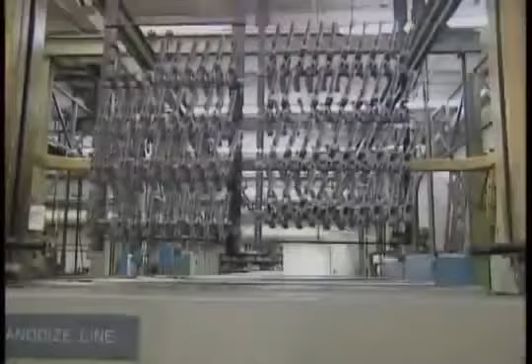It is forged from simple raw materials, but is so durable it can last more than 100 years. It has few moving parts, but its design requires complex engineering. Its purpose is basic, but it is one of the most powerful and destructive devices ever created: the making of a gun.

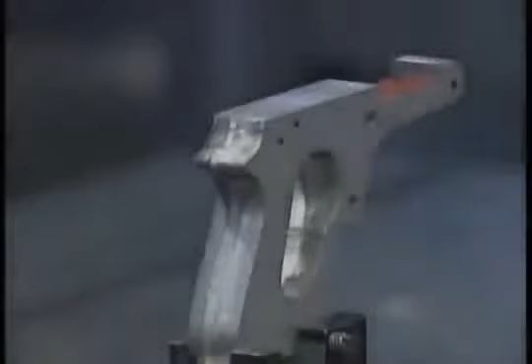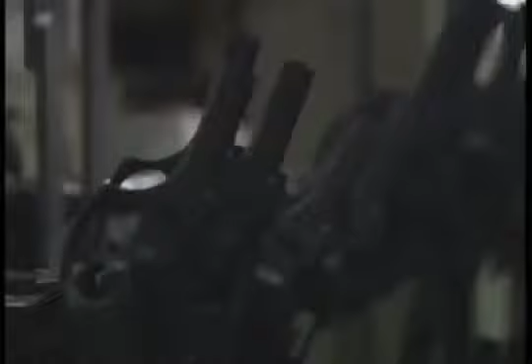In an unassuming factory outside of Washington, D.C., one of the world's most popular handguns is made. Tens of thousands of Beretta 9mm are purchased every year by the United States military and police departments. And though computers now do many of the tasks required to make a gun, the process mirrors procedures forged in the hearts of gunsmiths centuries ago.

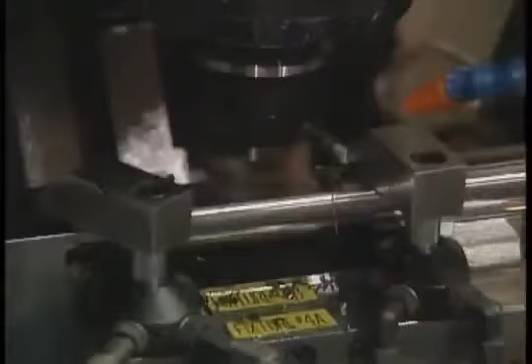Ever since the invention of guns, people have been fascinated by this handheld object that is a combination of art and craftsmanship, history, mechanics, romance.

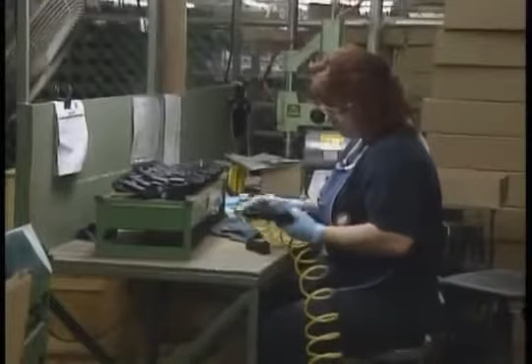Without the gun, where would America be today? We might be making Indian baskets. Maybe the British would still be ruling us. The gun has more fascination, at least in my experience, than any object ever made by the hands of man.

For those whose lives depend on guns, knowing that strict tolerances are adhered to on the production line brings peace of mind. If it gets down to gunplay, if it gets down to deadly force, then that's the way it has to be. And that's when I need the gun, and that's when I need to know, without any question, that that gun is going to work.

The making of guns and making them work helped revolutionize American society. The firearms industry was one of the first to use computer-aided design. Early gun makers were the first to use interchangeable parts, a radical improvement over previous technology. And guns were the first mass-produced item in the world. Knowledge developed from making guns forever changed how all businesses manufactured goods.

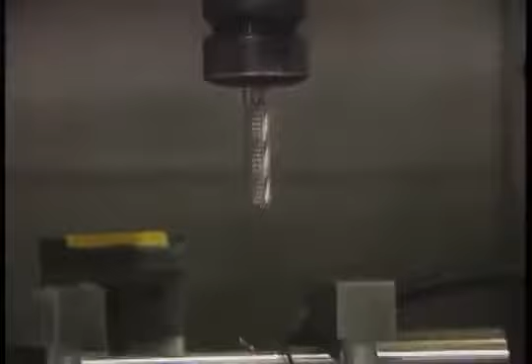We often think about Henry Ford as being the father of mass production. But in point of fact, the first 2 years of production at Henry Ford's Highland Park plant didn't equal the output of the Springfield Armory in the midst of the Civil War.

But it was some 400 years before the American Civil War that the making of a gun was first attempted. The first gun looks like a vase, and there's an arrow in it. And there would be a small touch hole in that and the powder inside, and when you ignite the powder, the arrow flies out.

But the crude early attempts were riddled with flaws. A gun rarely worked, and often wounded or killed the person trying to use it.

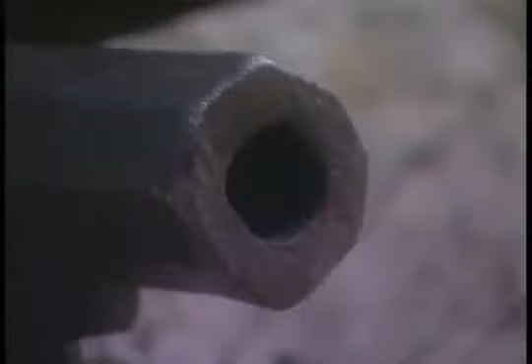The design was quickly replaced by the ancestor of today's firearm, the hand cannon, the little brother of the field artillery used at the time.

Not much is known about who developed the hand cannon and how, but the end result was much more effective than earlier attempts to make a gun. Heated wires were placed into the back of the tube to ignite the charge. Though rudimentary, the hand cannon was able to fire. The first version of the modern gun was born.

Nearly 2 centuries later, in the fledgling colonies of America, blacksmiths were busy retooling their workshops to deal with the increasing need for guns.

The firearms industry was busy experimenting with new types of materials and production styles, but making gun parts, such as the barrel, was still a time-consuming process.

These gun barrels were initially all hand-forged over anvils, and what you had was a ruler of iron about 3 feet long and about maybe 3 inches wide, and you had to heat that ruler of iron to a red heat until literally the middle turned red. And then you had to shape that with a hammer over an anvil to round it over a bic iron, which is a tube that you kind of inserted so the thing didn't close up on itself. But you literally shaped this through numerous heats until you had a completed tube, basically in the shape of a barrel.

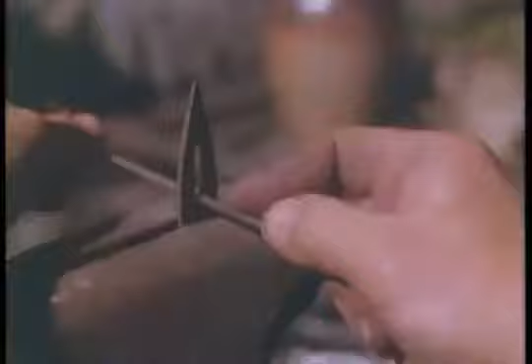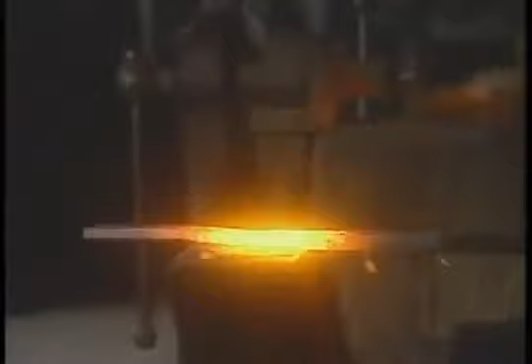One of the things that's interesting about this business is that we often think that one gunsmith made the entire gun. But in point of fact, the more aggressive and more successful gunsmiths often bought parts. For example, by the 1790s, early 1800s, there were individual shops around that just specialized in making gun barrels, as there were shops in England which manufactured firing mechanisms or gun locks and sent them to the United States.

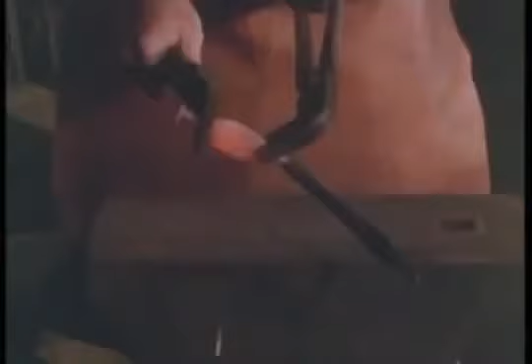It's very rare to look at a firearm made in the United States around 1800 by a small shop artisan and not find pieces made by other groups. I think it's correct to think of early American firearms as art objects. They're beautiful in many ways. They reveal a degree of workmanship unparalleled in most other areas of craft, because a gunsmith had to be a worker in iron, had to be a woodworker, also had to be a brazier working with brass, and oftentimes had to be an engraver.

But there were flaws inherent in early guns. Because of inconsistent forging techniques, barrels would sometimes fail when fired, often in the face of the person pulling the trigger.

Unfortunately, in those days, it was hard to tell whether you had a good barrel or a bad barrel until you proof tested it. You'd take it out on the grounds, put about four charges of gunpowder in it, and light it off to see if it would stand those charges.

There were other problems as well. It took gunsmiths up to a month to make a single gun. The price was prohibitive. Construction costs of a standard military musket in the late 1700s were between $13 and $15, a considerable sum of money for the time and place.

If you were to look at the wages of an ordinary working person at that time, say a farmer, I doubt very much that many farmers were making $15 a month in their wages. So if you compare the price of a musket with what people were earning at the time, you find out very quickly they're very expensive.

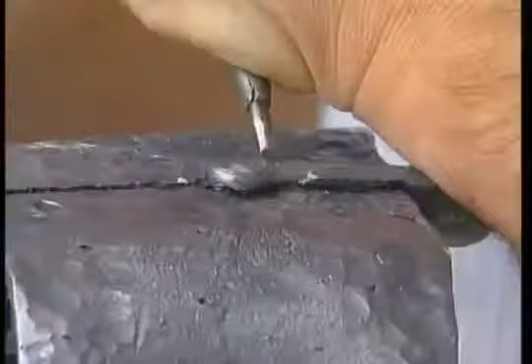One reason weapons cost so much was that each gun was unique. There were no interchangeable parts. This was a major drawback. If a part on a gun broke, such as the firing mechanism, a new firing system would have to be constructed specially for that gun.

It was a time-consuming and frustrating experience, especially for soldiers fighting on the battlefields of the American Revolution. Imagine a battle, and a part on a gun breaks for whatever reason. Perhaps it's the hammer that snaps. Perhaps it's one of the springs inside the lock plate. That rifle is absolutely out of commission.

Now, a gunsmith or an armorer would travel with a regiment. We're talking about a primitive operation, a little forge set up, a couple of hammers, some files, and this armorer is trying like mad to repair or make a new part to make that weapon serviceable again.

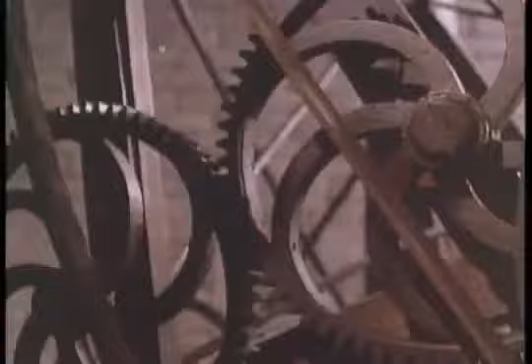One of the businesses Whitney went into was gun making. The federal government gave him an order for 10,000 muskets that had to be completed quickly. It was an order that even the self-assured Whitney knew would take years to fill. He would have to find a way to mass-produce the guns in order to make his deadline.

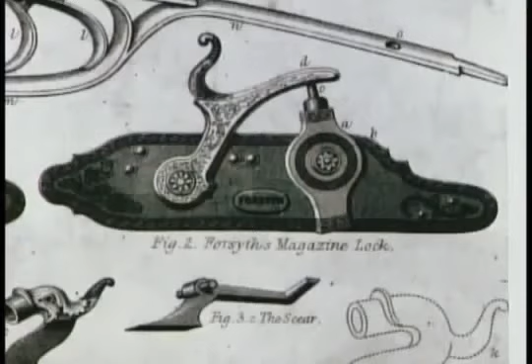And in order to mass-produce guns, he would have to make identical, interchangeable parts. That was something that had eluded gun makers for centuries. He had difficulty meeting this contract, and in order to cover up the fact that there were significant delays, he said he was trying to perfect a system of mass production and parts interchangeability. Whitney knew if a weapon could be developed in which parts were easily exchanged, the making of guns would never be the same.

When Whitney's delivery of muskets was delayed, he said it was because he was busy refining the nation's first gun made with interchangeable parts. To prove his claim, he invited government representatives to his factory to see for themselves.

He took several of his guns apart, mixed them all together, and then proceeded to put together several locks. The fact is, this was something he had prearranged. If he had been asked to do this with any one of his guns, he would not have been able to do it. Whitney, in his own lifetime, never did really achieve it, and the easiest way to tell is to get hold of some Whitney-made muskets from his first contract and disassemble them, and you'll find out very quickly that those parts are just not interchangeable.

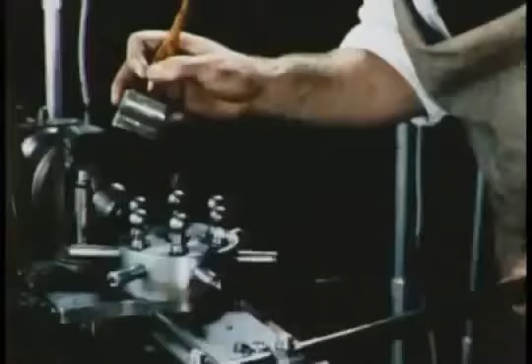Whitney eventually delivered his guns, but his quest for interchangeable parts had failed. It would be another 30 years before a trio of gunsmiths from a small town in Vermont would discover the secret to interchangeability and revolutionize the world.

During the early 1800s, vast improvements in manufacturing were being made in the United States. No industry saw more rapid change than the business of making guns.

Many weapons made during early American history were considered works of art, adorned with brass, ivory, and fine engravings. It was not uncommon in the late 18th, early 19th centuries to find guns heavily embellished with silver and brass inlays. Some guns, I've even seen one where the barrel was made by a guy named J. Christ, a barrel maker down around Lancaster, Pennsylvania, who evidently did nothing else except make barrels. This particular gun had not only brass and silver inlays, but also ivory inlays. It looked like it was almost made in Arabia or somewhere like that, almost un-American in its decoration, and yet it is a Lancaster County-made firearm.

But gun buyers still had to deal with the lack of interchangeable parts. If just one part on a gun broke, the weapon was rendered useless. Gun makers knew that if firearms could be made with exchangeable parts, guns could be mass-produced, a step that would forever change the industry. Though some designers had limited success, none could create machines with the intricate tolerances required to consistently make gun parts the same size.

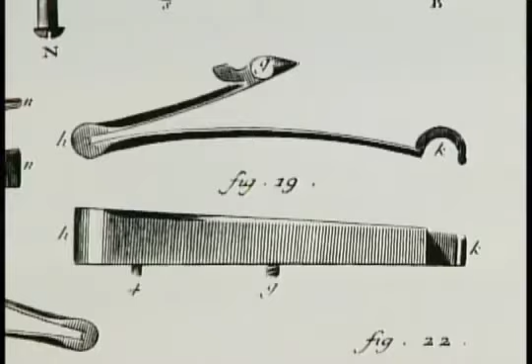But all that changed during the early 1840s in the small hamlet of Windsor, Vermont. There, a trio of businessmen, Nick Kendall, Samuel Robbins, and Richard Lawrence, had an idea. They wanted to use the river that ran through town to power machine tools. The three men incorporated the river's energy with their ideas of mass production. The result was some of the world's first automated gun-making machines, machines that made gun parts the same size over and over again.

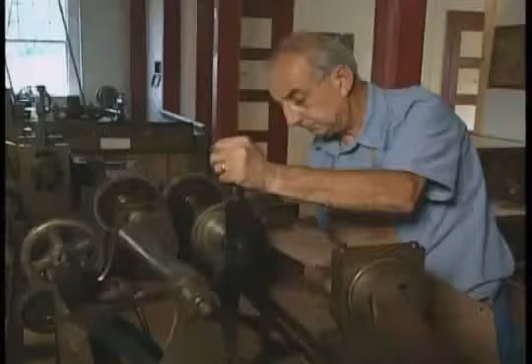Well, the secret was, let's begin to use some of these new machine tools that are starting to show up. Machines that could now begin at least to cut the contour of the stock of a rifle so that you didn't have to carve it by hand. Simple milling machines that could begin to form a lock plate for a rifle. A simple lathe that might be able now to turn a barrel instead of forging a barrel.

The company experimented with new designs as well. Nick Kendall developed a different position for a firing hammer thanks to the dress of his bride-to-be.

The story goes that Nicanor Kendall was out in his buggy with his fiancée. Of course, those days you carried your rifle with you in the buggy. You're out in the countryside looking around, beautiful day. Some critter crosses the road in front of him. Kendall reaches down, grabs his rifle, pulls it up to his shoulder to take a shot. In the process of lifting his rifle, the hammer gets caught in his fiancée's petticoat, just enough to pull it back, it snaps forward, the gun discharges. Kendall feels this terrible burn. He's sure that the bullet's gone right through his hand and killed his fiancée. By the time the smoke clears, he realizes no, he just got a small powder burn, and his fiancée, thank heavens, was fine. That led Kendall to come back to his shop, begin to putter around, and develop the underhammer, so there would be no danger of the hammer getting caught on somebody's petticoat.

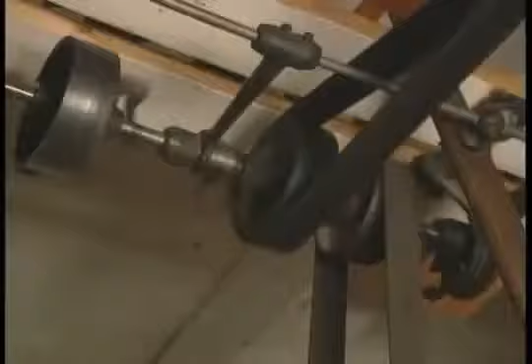By 1843, after years of trial and error, the firm had finally perfected machine tools that adhered to the tolerances needed to make interchangeable gun parts. They received a government contract to produce 10,000 rifles. The faster they made the guns, the more money they made. It was great incentive. The technology all comes together, and these 10,000 rifles they produce for the government, every nut, bolt, and screw, every component part is interchangeable one gun to the next, not with any sloppiness in the tolerances, but beautiful, fine fit and finish. The government's thrilled. They finally have got interchangeability, this quest they'd been after for so many years.

The moment marked the beginning of a manufacturing revolution. Other gun-making firms, including the government's own armories in Springfield, Massachusetts, and Harpers Ferry, West Virginia, quickly followed suit. It's the period between 1815 and 1864 that you begin to see the germination of this new technology, based on the introduction of machine tools and precision measuring devices, that culminates in tremendous production taking place, not just at the Springfield Armory, but across the entire American firearms industry.

Kendall, Robbins, and Lawrence continued to lead the field. In 1851, they traveled to London to display their guns at the Crystal Palace World Exhibition.

Their display consisted of nothing more than taking six of these Mississippi rifles, disassembling them, scrambling the parts around, and then reassembling them. The British went berserk—they couldn't do that. The only analogy would be the reaction we had when the Russians launched Sputnik.

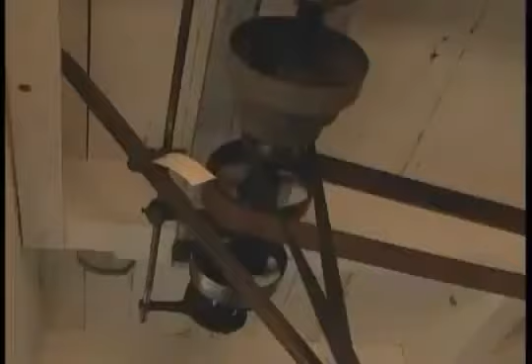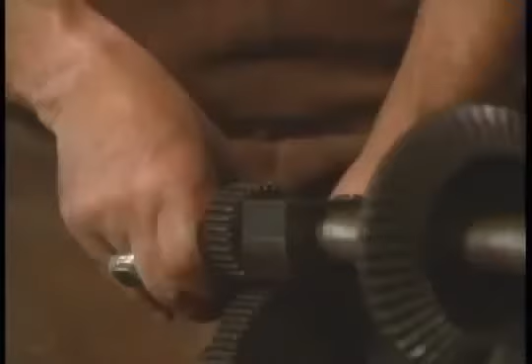Kendall, Robbins, and Lawrence agreed to make guns for the British. When the Crimean War broke out in 1853, they were given an order to produce 25,000 Enfield Minié rifles at a cost of $25 each. Once finished with that, there would be another order for 60,000 additional rifles. The contract contained a penalty clause if the firm didn't deliver on time.

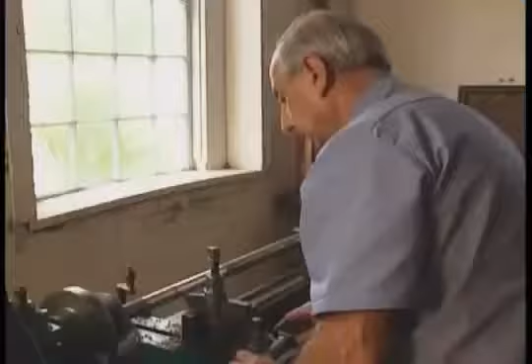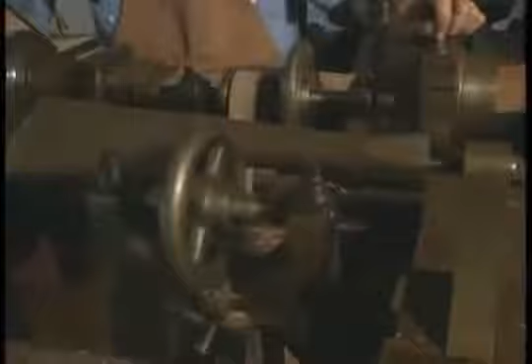It was like a black cloud. Everything imaginable that could go wrong with the production of these guns went wrong. Really silly things—like the wood for the stocks of these Enfield rifles came from Pennsylvania. There was a drought, all the little sawmills shut down, and they couldn't get any wood for the stocks for a whole summer. The gauges requested from England were made out of hardwood, and on the sea voyage over, they split open. Robbins and Lawrence had to make their own set of steel gauges. So it was one delay after another.

By the time the Crimean War ended in 1856, Kendall, Robbins, and Lawrence had delivered only 14,000 rifles of the initial order. The British government sued, the company went bankrupt, and in order to satisfy creditors, the firm's factory became property of the English Crown.

Ironically, one of the most innovative gun manufacturers had been put out of business on the eve of the most concentrated push toward mass production of guns the world had ever seen—the American Civil War.

No matter how they may have felt politically, on the eve of the American Civil War, gun manufacturers both North and South knew they were in for a financial bonanza. The only problem was how to keep up with demand. The makers of firearms began experimenting with new ways to make guns faster and cheaper.

A firearm made in 1864, compared with a firearm made in 1815, was qualitatively a much better gun—primarily because there were fewer possibilities of failure. Barrels were not going to blow up as often as they would have in 1815. Technologies had improved to the point that you just had fewer failures of parts than in that earlier period. The result was the most efficient system of manufacture yet in the history of any product, and it was the gun makers who led the way.

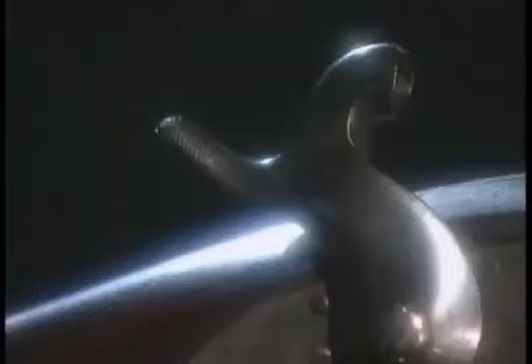Huge orders for guns became common during the war. Factories struggled to keep pace, and raw materials such as steel and wood became as valuable as food.

The gun manufacturers of the North, especially the armories at Springfield and Harper's Ferry, became the nation's first centers of mass production.

But the logistics of shipping raw materials to firearms manufacturing plants, especially during wartime, was a tremendous challenge.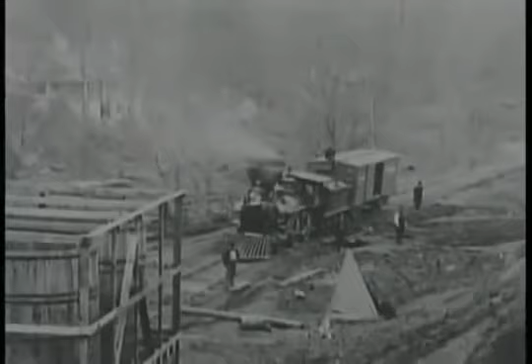Railroad lines became vital links. Materials were shipped by the trainload to gun-making plants. Within days, crates of rifles and pistols were on their way to the front. It was a 24-hour-a-day operation.

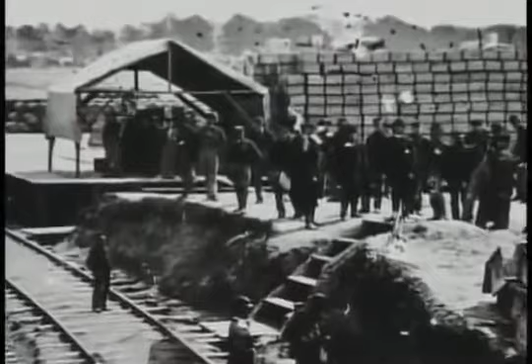The Civil War is a period of big change in gun making because it's a time that witnesses the manufacture of firearms in very, very large quantities.

The Springfield Armory, which is one of the two national armories in the United States at that time, by 1864 was manufacturing well over 250,000 rifle muskets a year.

Increased productivity brought opportunity. As one model of gun was tested on the battlefield, the next generation of design evolved from its predecessor's mistakes.

Firing farther and faster was the battle cry of gun manufacturers. Technology improved more during the 4 years of the American Civil War than in any other time period in the history of the gun. It changed the course of the way battle was done.

It changed the way that guns were made, and it increased the ability to kill dramatically.

Imagine that at the beginning of the Civil War, some regiments were going into battle still carrying smoothbore, flintlock muskets left over from the Revolutionary War period.

By the end of the Civil War, the repeater is developed. The modern cartridge, exactly the same as we use today, has been invented. Even the principle of the machine gun, the Gatling gun, had been laid out. So all of this happens just during the period of the Civil War.

A technological change in firearms that is probably as dramatic as the technological changes that we're seeing with computers today.

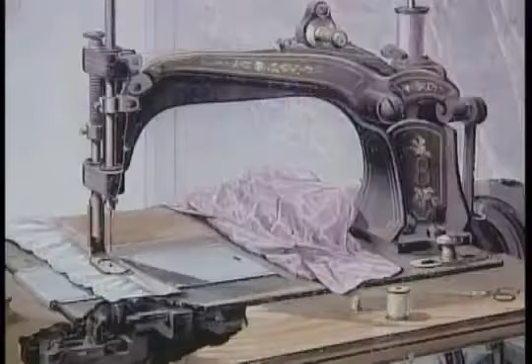The Kendall Robbins and Lawrence factory in Vermont, which had supplied guns to the Union during the war, was refitted to make sewing machines. The Remington Firearms Company, which made rifles and revolvers, retooled its gun-making machines and later made typewriters.

The bounty of weapons that had been produced during the war went home with the soldiers. Well, one of the interesting side effects, or after effects, of the Civil War was the enormous number of firearms that entered the general population after the war ended.

There's been a lot of new research on what happened to the guns that Union soldiers were carrying during the Civil War, and the answer is that they were allowed to carry their guns home. And of course, this meant that hundreds of thousands of new firearms entered the general population, whereas they hadn't been there before, or at least not in those numbers.

The United States in 1865 was probably the most heavily armed society in the world at that point because of that phenomenon. The lessons learned during the Civil War propelled gun manufacturing well into the 20th century.

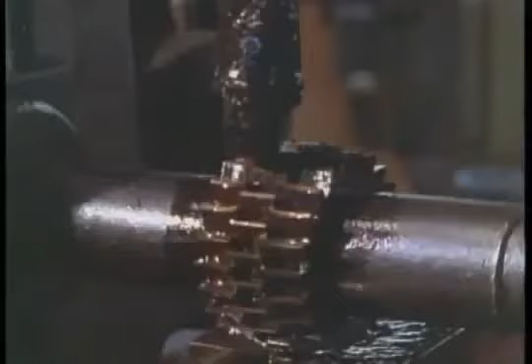American gun makers continued to push the limits of new technology. Stronger metals were used to make guns lighter and more durable. Improvements in gunpowder and bullets helped make firearms more lethal from longer distances.

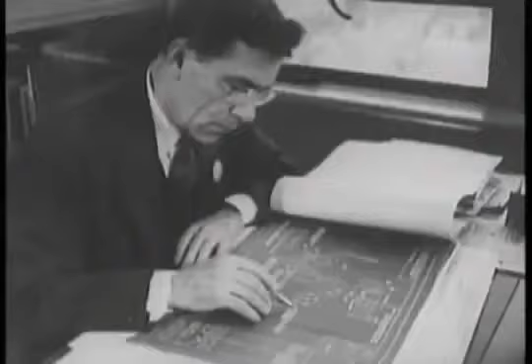The gun-making expertise of U.S. firearms makers caught the attention of foreign governments, and the United States became the world's top exporter of guns.

Americans selling to a lot of people, Americans tooling the armories of other people making better guns and driving Americans out of those markets. And then, it's almost as if the beginning of World War I began with the end of the Civil War.

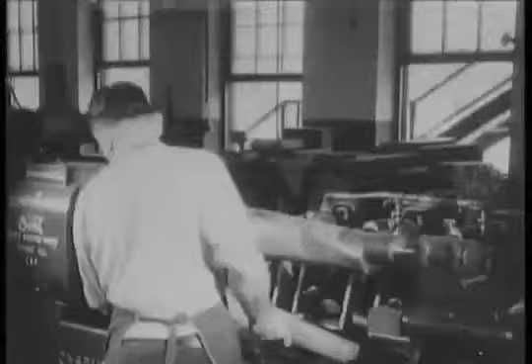During World War I and World War II, guns were the ultimate item of mass production. A machine tool factory could be refitted in less than a week and have firearms pouring off the assembly line.

Changes in gun design allowed firearms to fire faster with more killing power, and the pace of manufacturing had drastically accelerated.

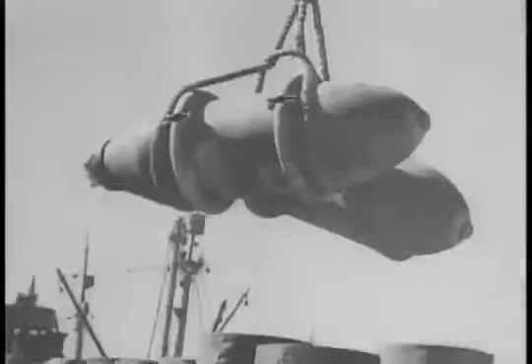But the process continued to be cyclical. Every time the world geared up for war, firearms manufacturers were able to meet the demand. Hundreds of thousands of people would be put on the assembly line, and millions of weapons would be pumped into the war machines.

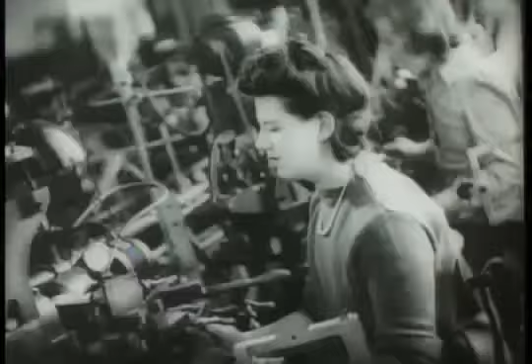As wars ended, gun production would drop dramatically. Factories would again return to making consumer goods like radios and televisions, employing the same production techniques used to make guns for the military.

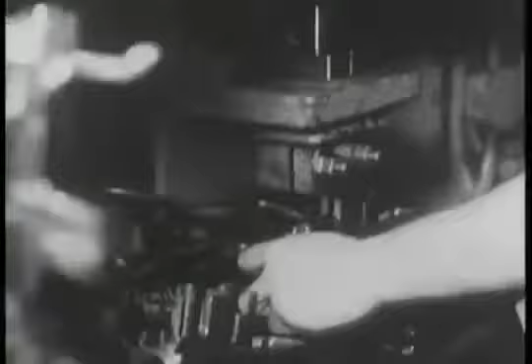But another revolution was just around the corner. It would be the biggest transformation since interchangeable parts. The computer was about to take a shot at the making of a gun.

At the Beretta manufacturing plant outside of Washington, D.C., the computer has become a key component in the making of a gun.

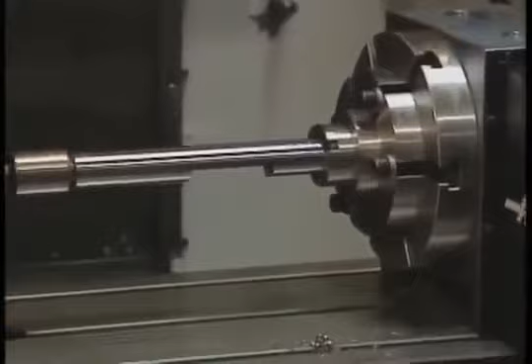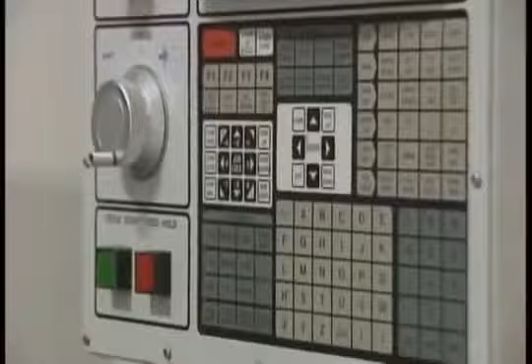This is a completely computer-controlled machine, including the rotation of the fourth axis. All we're doing is loading a program, just like you load a disk on your PC at home. We load a program that tells the machine exactly which tools to put in, which cuts to make, in which sequence. It'll rotate the part and reposition it for the new tool.

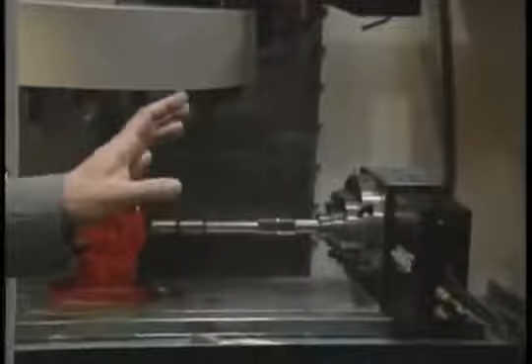It'll change tools during its cycle and make multiple cuts. In the old days, we probably would have had 7, 8, 10, or even 20 different machines making each one of the cuts individually and reloading the part in and out of the machine every time. In this case, we can load it one time, make multiple cuts in multiple directions, and I can walk away and just let it happen by itself.

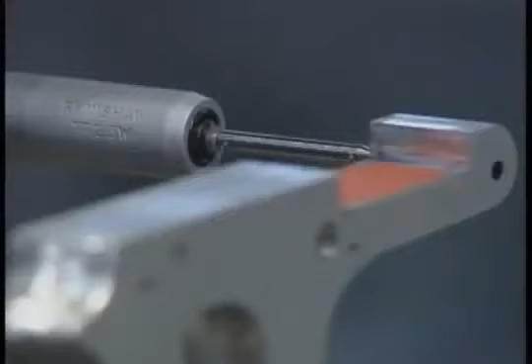200 years ago, making this one handgun would have taken a gunsmith more than a month. Computer-aided manufacturing has the process down to a few hours.

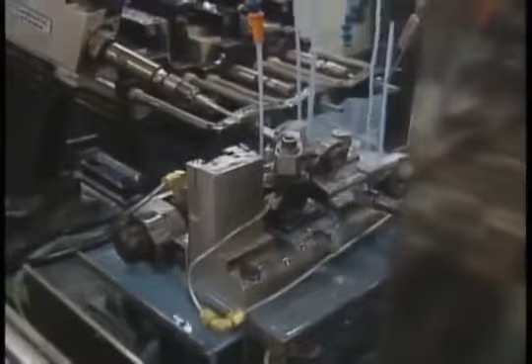This is a special drilling machine that was designed specifically for the manufacture of the 92-96, and as you can see, it's doing multiple drilling operations simultaneously. We load one part into the fixture, and we're drilling and reaming holes from the front, from both sides, all at the same time. When we take a part out, we may have done what it used to take in the old days, 7 or 8 drill presses in a line, all in one operation, in roughly the same amount of time that it took to do one. Now we're doing 7 or 8 of them in that same period of time.

Beretta is the oldest gun manufacturing company in the world. It was founded in the early 1500s in Italy. 14 generations later, the Beretta family still maintains tight control over their product.

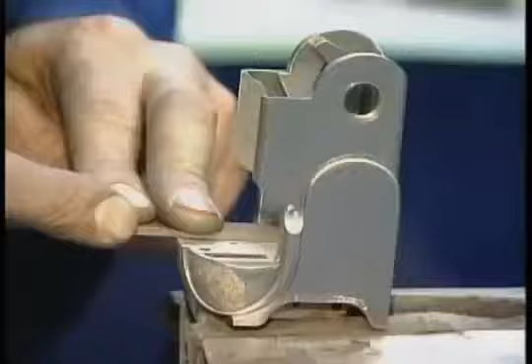Beretta is famous for its 9mm pistol, which sells for $600.

One of the most extraordinary firearms ever made is this Beretta Model 92 FS automatic pistol. This was designed in the 1980s and was adopted by the U.S. government for all its armed services. It has been adopted by over 2,000 police forces and armies all over the world. It represents the ultimate evolution of the semi-automatic.

It fires a 9mm cartridge. It holds approximately 15 rounds in the staggered magazine. The way it functions is the slide is pulled back, and when it is released with this thumb lever, it picks up the cartridge from the top of the magazine, and when it is ready to fire, you simply pull the trigger, and the entire process is repeated very quickly.

It has an ambidextrous safety, which means it can be set from this side or this side. And when it's pushed down like that, the hammer falls and does not hit the firing pin. Another sophisticated detail of this pistol. There are so many features on this pistol that it would take about 20 minutes to explain them all.

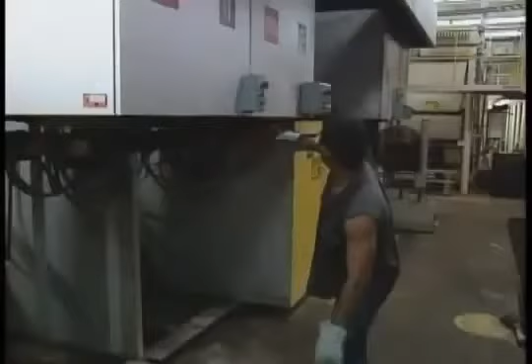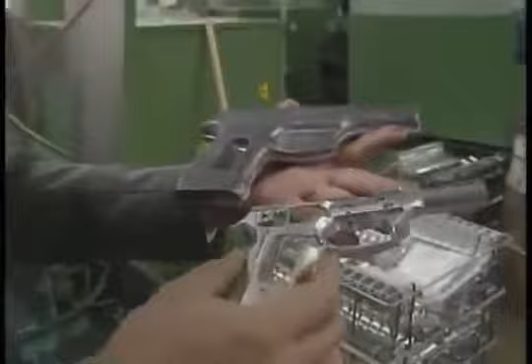The making of a 9mm Beretta begins with simple raw materials. A block of aluminum, which helps keep the gun light, is cut and molded into the framework that will become a handgun. The frame is drilled and grinded according to specifications in the gun's computer-aided design.

Before the slide can be fitted with the barrel, it must be checked for tolerances. The computer makes sure the job is done right.

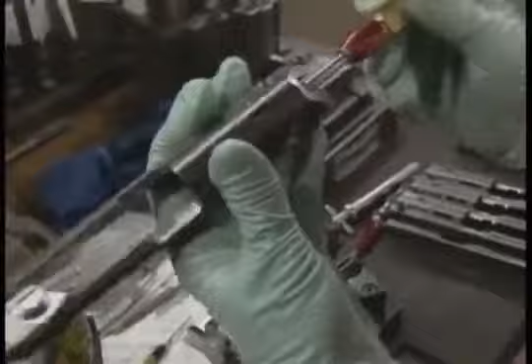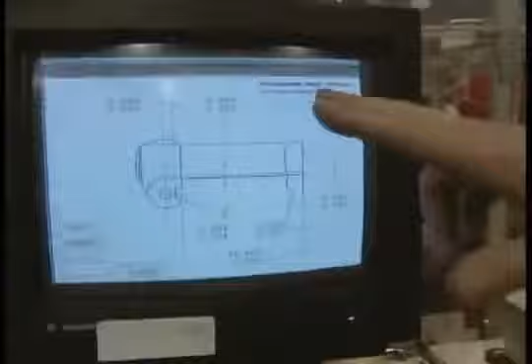Here we have an in-process inspection completely controlled by the computer. You can see on the screen all the dimensional characteristics that we're going to check on the part, and the computer will actually check the part when we load it in the fixture, and the screen will light up with red and green whether it's good or it's out of tolerance.

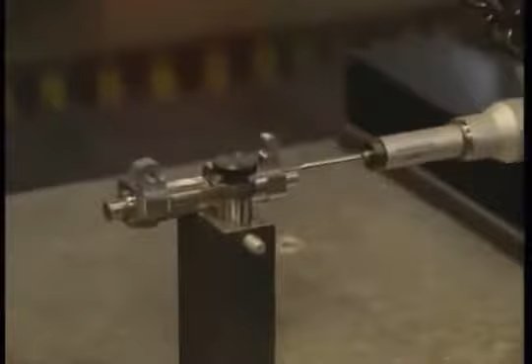The manufacturing of a firearm requires very tight tolerancing. We manufacture everything in millimeters, and we're measuring things in thousandths of a millimeter. Just to give you an example, if I were to pull a hair out of my head and split it in about 5 pieces, one of those pieces could be equivalent to the tolerance held on the overall headspace length of a barrel.

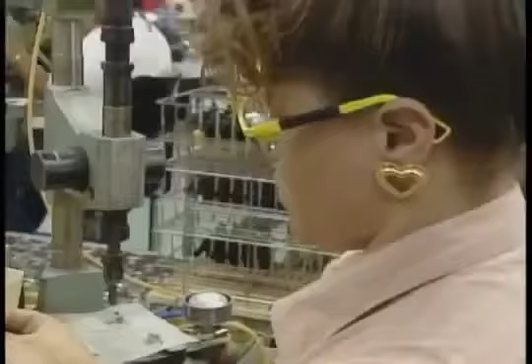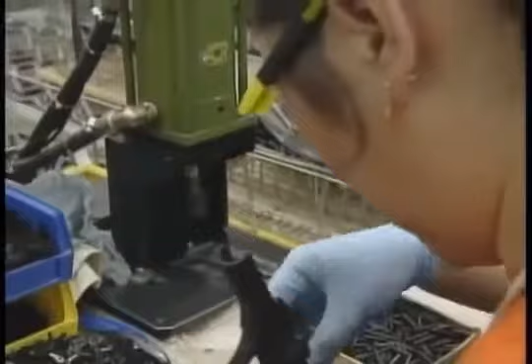Despite all the high-tech gloss and machinery, much of the work done at the Beretta factory mirrors the gun making of decades or even centuries ago. The unique factor that we have here is the fact that all of these parts are interchangeable. Any receiver, any small parts, no filing, no fitting, they're all interchangeable. We can put any components in. The only thing that has changed is the speed and accuracy with which guns can now be produced.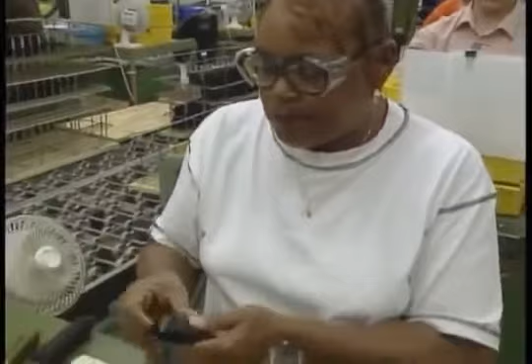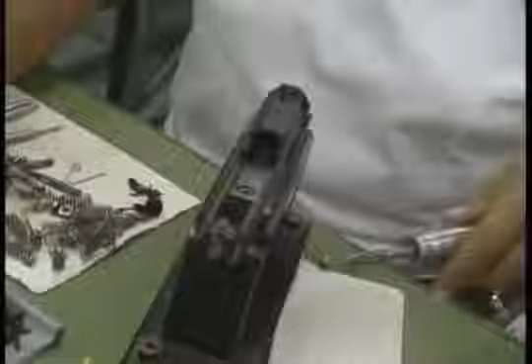Even in the computer age, the century-old desire for interchangeable parts is still a concern. When we do an interchangeability test here at Beretta, we pull a pistol completely apart. We take 10 pistols apart after they've been completely tested. We mix all the parts up, put them back together in some other 10 configurations of pistols, and then we expect the same testing results and pass all of the same testing criteria as when we started.

Once the gun passes tolerance and interchangeability tests, it goes to the polishers, who grind down any minor imperfections left in the weapon's finish.

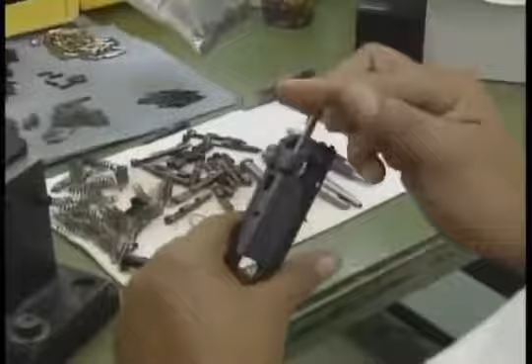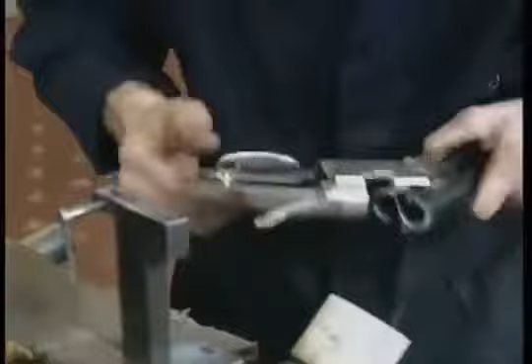Some of the parts are built using computer numerically controlled machinery, but at the same time there is a certain amount of hand labor that's necessary. There's enough hand filing, there's enough hand fitting. So at one point you're going to be watching gunsmiths sitting at a bench the old-fashioned traditional way, but they work so fast their hands are a blur. And bingo, they've got the gun assembled and it's ready to be test fired.

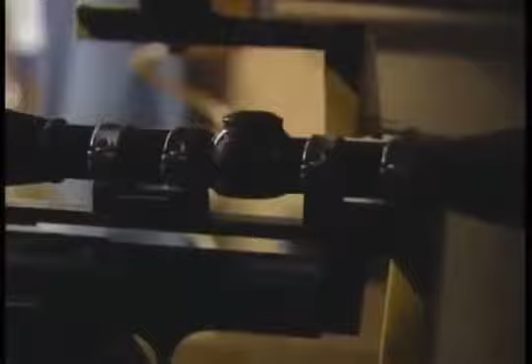Before any gun made at the Beretta factory is delivered, it must be test fired for durability and accuracy. An operator bolts the gun into place, sets the sights for a target 25 yards downrange, loads the weapon, and stands aside while pulling the trigger, thus ensuring that the factor of human error is eliminated.

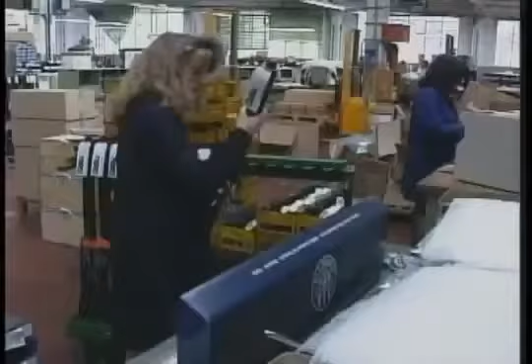Every pistol that we manufacture at Beretta, either in the U.S. or in Italy, all of our pistols, all of our shotguns, and all of our rifles are all test fired at the plant. They're proof tested to make sure that they will withstand 130 to 140% of the pressure of standard ammunition. And then they're function tested to make sure that they function correctly, and then all of our weapons are also tested for targeting and accuracy. The guns are then packaged and shipped to military arsenals and gun shops around the world.

Officials at Beretta believe their weapons are some of the finest mass-produced products in history. Maintaining that quality level in the firearms business is set by the ownership of the companies. In our case at Beretta, it's always been family-owned. There are Berettas, and the Berettas are the people who run the company, and they expect that standard. They've kept this company going on for 13 or 14 generations, and you don't do that by setting low standards on quality, or not producing good products, or not believing that you manufacture a product that's made for a lifetime.

The final step in the making of a gun doesn't happen in a factory at all. It comes when the gun is pulled from its wrappings and placed in the hands of the people who rely on them most, the police and the military.

In the nearly 500 years of firearms manufacturing, the final step in the making of a gun has come not at the factory, but when the gun buyer pulls the trigger.

David McKenzie has one of the toughest jobs in law enforcement. As a police officer in the Washington, D.C. area, he's assigned to hunt down fugitives wanted on arrest warrants. He carries a gun with him 24 hours a day.

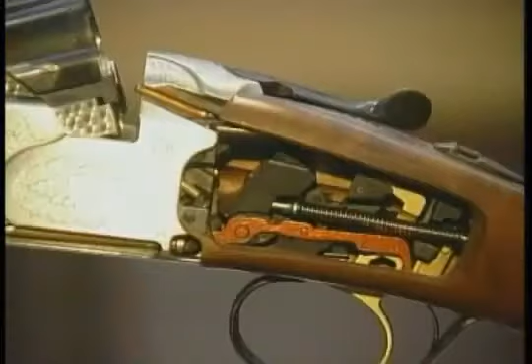You want to check the lock mechanism on it, make sure it locks up properly, make sure it's aligned properly. You need to know what kind of barrel is on it, what kind of twist there is in the barrel. I start messing around with the trigger to see what kind of trigger pull it had.

When I'm looking for a gun, I usually try to get one from somebody that I know. I know a lot of people in the business, a lot of people in the craft. More often than not, especially an old guy in an old gun store, he's going to know an awful lot more about that weapon than you do going in.

Gun manufacturers recognize that their product is essential to police officers like McKenzie. The most critical thing to law enforcement is when they pull that weapon out, they have to feel comfortable and depend that that weapon is going to do what it's intended to do. It's their life on the line at the point where they need to pull that weapon and use it.

So reliability and durability of the weapon is very important in law enforcement. My primary concern for police officers is that they go home at night. If you need to pull your gun out in the line of duty, then you shouldn't really be bashful about doing it.

But law enforcement and the military are not the only places where the making of a gun ends. A large segment of the population owns guns. Many purchase weapons for sport shooting and collecting.

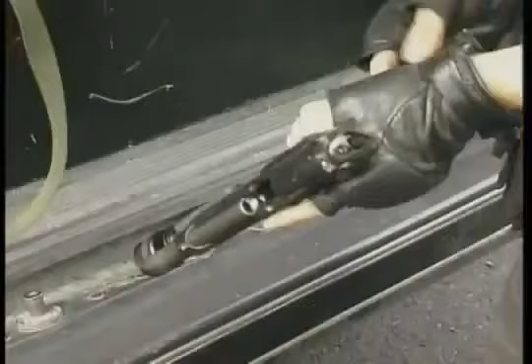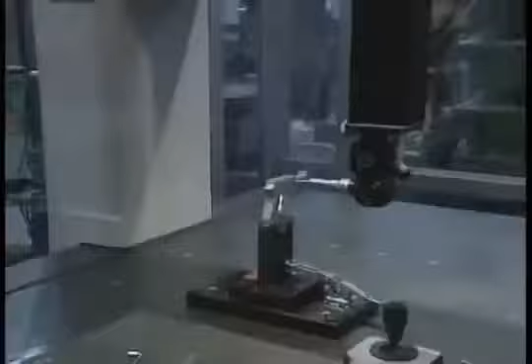Those familiar with the history of guns say firearms made by modern gun manufacturers today have reached near perfection. Gun making today is an unusual combination of the old and the new. The demand by the customer to have a very high caliber, high quality firearm is probably more intense now than it has ever been in history. The capability of the industry to manufacture perfect guns is at a status that has never been achieved in any of the 500-year history of gun making.

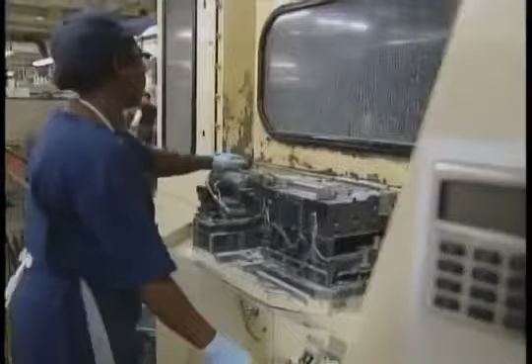As gun-making technology improved, the ability of gun buyers to spot poorly made guns has increased. A crude gun is a crude gun whether it was made 150 years ago or made today, and a beautiful gun is a beautiful gun whether it was made 150 years ago or today. You enjoy them on their own merits.

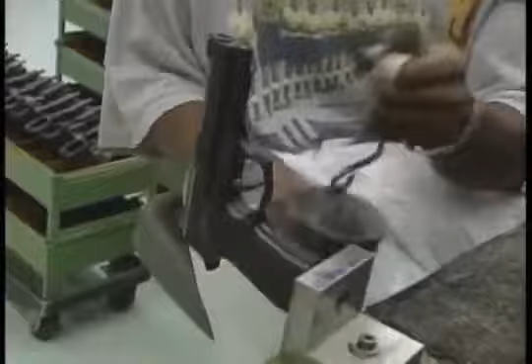Today, the making of a gun is considered a marvel of manufacturing, not because a gun is a sophisticated piece of equipment, but because it is a product that is built to last a lifetime. People take pride in owning firearms, and most people take care of them.

They clean them and they put them away, and they don't just throw them in the corner of a closet or mishandle it the way they might in other products. So I think there's a little bit of pride of ownership there in the way that they take care of it. In a lot of families, it's a big deal as to who's going to get Dad's gun when he doesn't want it anymore.

Regardless of how people feel about the making of guns, the influence of guns on society has been deeply felt and profound.

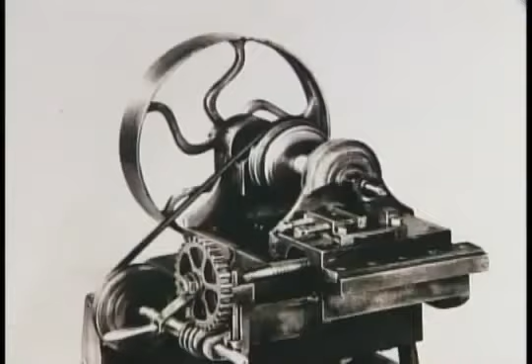We're not revisionists here. We don't want to change history to make it sound right for the right person. This is a fact. The lifestyle you enjoy today is possible because of the machine tool. The leisure time you have today to pursue education, to do whatever you wish, is because of mass production. The machine tool makes that possible.

What led to the evolution of the machine tool? It was the gun. For those who find beauty in the handcrafted workmanship of a well-made gun, the firearm is a thing at which to marvel.

There are millions of people who want guns. There are not only the governments that need them for their defense industry, but there are hobbyists of all kinds. Most gun makers want to be at the forefront of technology, and I think that it's anybody's guess where it's going to go, but the one thing is for sure, quality gun making is something that is here forever.

Some would like to see gun manufacturing shut down altogether. Others believe the world would be a safer place if every person owned a gun. The debate over the future of the industry is far from over.

People are raised up with guns and just feel more comfortable with them. Many people who live in urban areas oftentimes have never even seen a gun before, let alone seen one fired, and are scared to death. And for good reason. They're dangerous things.

And if you're not acquainted with how something works and not acquainted with the practice of using these things safely, then you have good reason to be worried about firearms.

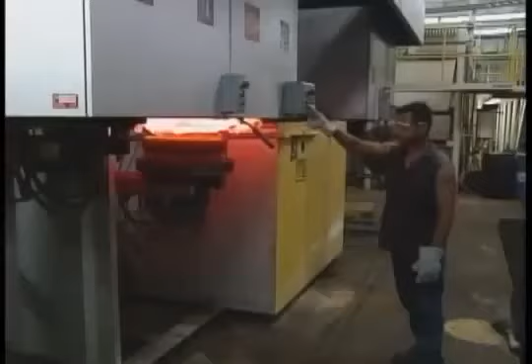It is a process forged from ingenuity, raw materials, and fire. It has changed the world for the better and for the worse. All the power and destruction mankind has ever created still remains in the making of a gun.